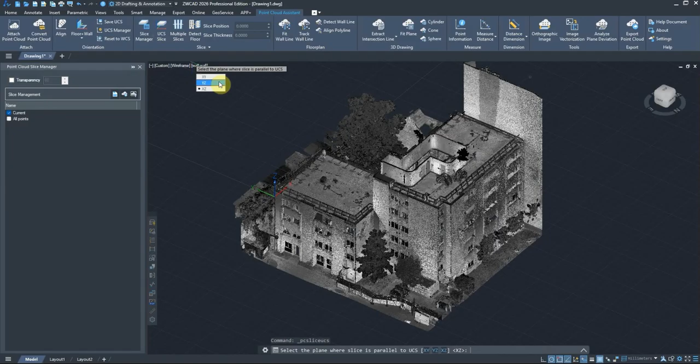So let's imagine that I want to make a slice to isolate this facade. What's the plane parallel to this facade? Well, here it's clearly the YZ plane. So I choose YZ, and now it asks me to specify the first point of the slice.

And here, unlike earlier when we used a point on the facade to define the UCS, here the goal is to give some thickness to the facade we want to isolate. So we're going to define that thickness using 2 points. So pick, for example, a first point behind the element you want to isolate. Here, we'll take a point on the flat roof.

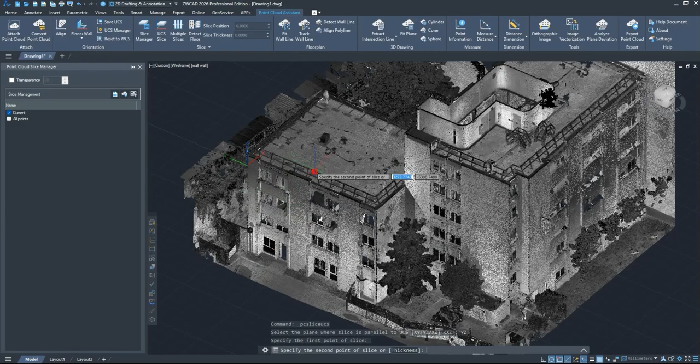Next, it asks me to select the second point. And for the same reason, if I pick a point on the facade, the slice will be flush with the facade and may end up cutting through elements like balconies or concrete structures. So instead, pick a point on the sidewalk like here. This way, I'll leave enough room for the elements we want to isolate. So now we have our slice done.

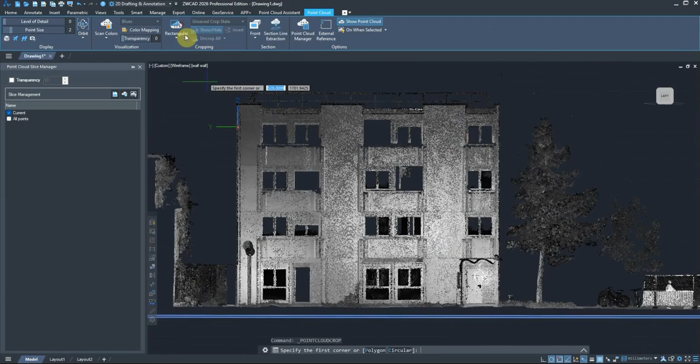And by combining these features with native ones in ZWCAD Pro, like rectangular cropping operations for point clouds, I can isolate the facade by removing the stray elements on the left or the vegetation on the right. And now it asks me if I want to keep the point cloud inside or outside the rectangle. So I choose inside. And as you can see now, my facade is perfectly isolated.

Once I've done that, I might also be interested in exporting it. To do that in the Point Cloud Assistant, there's this Export Point Cloud button just right here. You also have it in the Point Cloud Slice Manager, Export Point Cloud Data. So let's make an export now.

I'll first define the export path, so let's go into my PCA folder, and here I'll create a new folder named Slice. And here I will name this point cloud export Isolated Facade. Also here in the file type, as you can see, I have a choice between PTS and RCS format, which will have some consequences in the saved file. So I'll click on Save.

You can see down here, exporting point cloud files. We wait a few seconds, and there it's done. You can read point cloud exported successfully. So now, if I open a new file to attach the point cloud, and I go back to the Slice folder here, and choose this format because I exported it as PTS. Here I click OK and I pick a point.

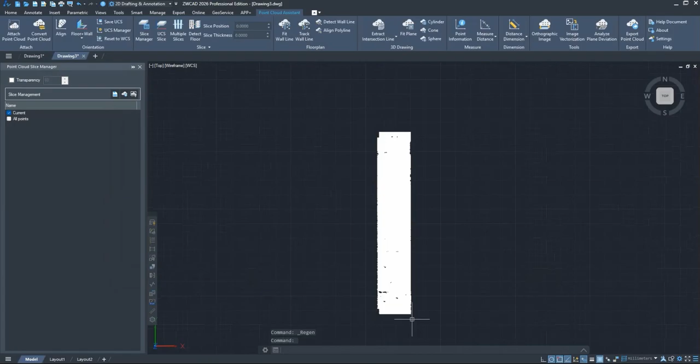And here is my exported facade, and you can see I'm now in the WCS with a perfectly squared isolated facade. This is the result of choosing the PTS format. The current UCS overrides the original WCS during the export. If we had chosen the RCS format instead, it would have preserved the original WCS.

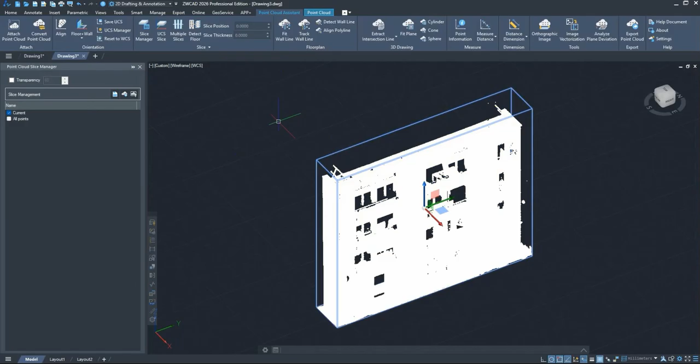You might also have noticed that the scan color mapping has been overridden by the object color, but you can still access the other color mappings, such as elevation or intensity. So keep that in mind if you ever need to export and choose between the two formats, PTS and RCS.

Alright, so let's go back here. Now that I've performed the slicing operations in the Point Cloud Assistant using the UCS Slice, exported the result, and also shown how the Slice Manager works, we'll move on to this feature in the next video, multiple slices.